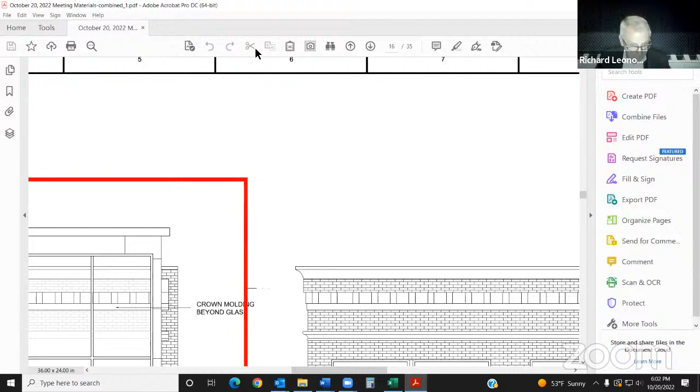Now the big one, I think, is coming. We have two more things. Yes, two more. Next is 519 Linden Street, JBAS, renovations, alterations, and restoration. I have to scroll back up, I'm sorry. Now, this is a major project. Yes, it is.

There we go, all right. Okay, let's go into the pictures there, Brittani. Okay, there's the existing conditions. Correct. And this was what was proposed.

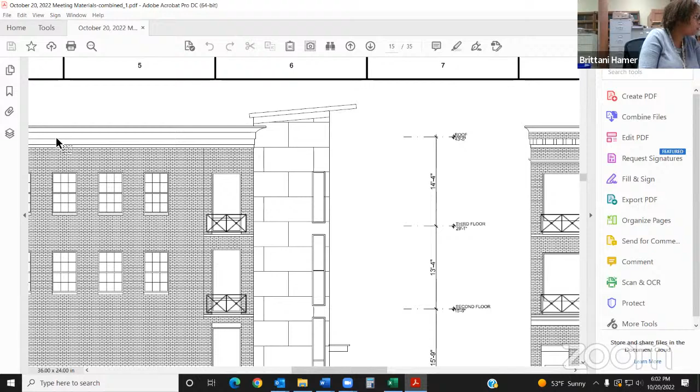Now, if I could zoom out, that'd be great. So if you can roll this around a little bit. So this structure that's going in front, what is in it? That's a stair? Yeah, is that a stair? Kerry, is this your work? Yeah, I didn't submit these to HARB, but yes, this is our work.

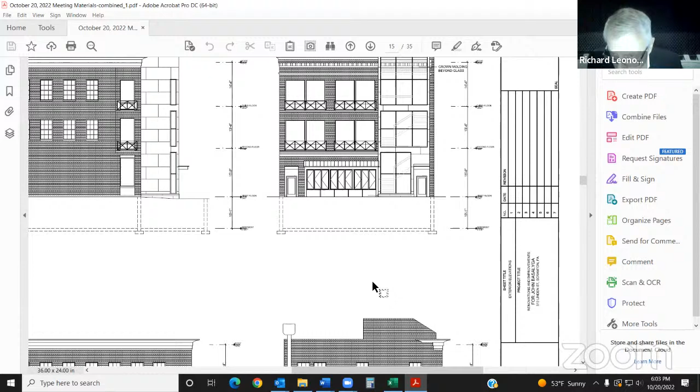Okay, so that is a stair and it is attached to the one side, that's the back. Let me ask about, let's go, the easy parts are the sides. You are cleaning up the sides and both sides will have windows? And it's going to be natural brick or painted brick?

Well, the objective is for natural brick, to clean up the painted brick in the fronts and bring it back to original. We've discovered through some selective demolition that the masonry has no masonry ties and it's zippering, it's delaminating, I'll say, from the wall.

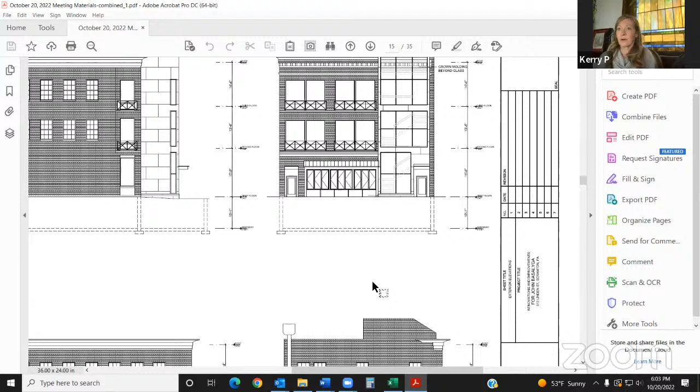So the hope is really to reattach and to maintain a brick look. That'll definitely happen in the front, it'll definitely come around the corner, the historic corner. If you go to the left elevation, you'll see this is over the law offices there. But then we have a problem in that there are no brick ties tying this brick back to the building.

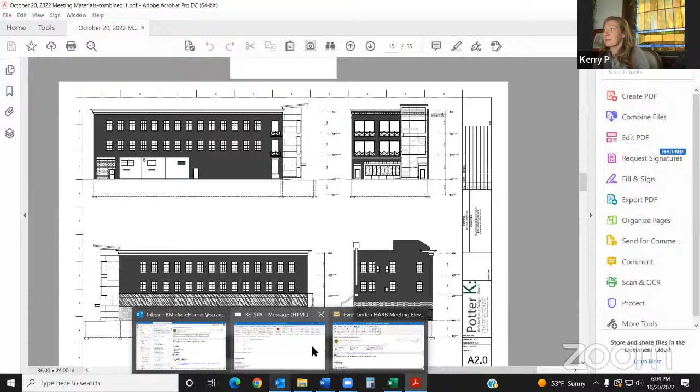So if you go, Brittani, I sent you some rendered elevations. I don't know how difficult— Nope, it's fine, I've got it. I got it just before the meeting, so I'm sorry. No, I'm sorry that they got to you so late. Oh, here we go, yeah, so this should answer a couple of your questions.

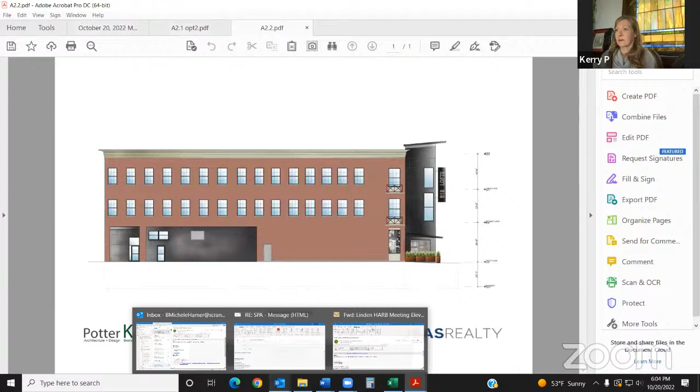This is the design intent, right? Okay, so this is the alleyway, and then this is the party wall that abuts Brickyard next door. Okay, so the windows that we're showing are basically the historic windows.

There's a decorative railing that is on the third floor. It's not present on the second floor right now. I don't have historic photos of this building, so I'm assuming that wrought iron or metal rail is original, and so we were going to duplicate it on the floor below.

Perhaps there's also some talk about having access to a roof deck from those second floor apartments, so maybe doors open out onto a flat roof. What you're seeing on the ground floor, from what I'll call the tower going left, is what will look like a 3-season room, although it's an all-season room with NanaWall, folding glass partitions, opening up onto the street and planters. We wouldn't be building any further out than the existing addition that was added on, God only knows when, that 2-story addition out front.

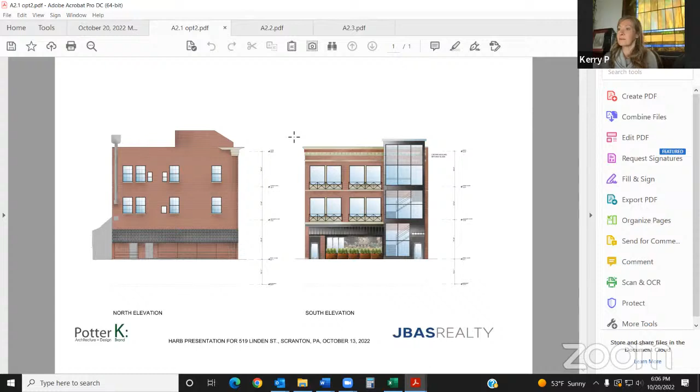We own that far, according to survey. Okay, and then cutting a hole—if you go, Brittani, real quick. Sorry, these weren't PDF'd together, they're all separate files.

This is the existing fenestration. There's an area of stucco that right now we're showing as a zinc metal panel, some kind of metal panel—it looks black. So it's a metal panel covering up a patch job in stucco that exists. Anything that looks like brick in the rendering is what's being shown as brick now, and anything with this metal panel is right now stucco. So this is the existing fenestration pattern.

You go, Brittani, to A2.3, the next page. Thank you. These windows don't quite exist—they may have existed in these locations, but they've all been stuccoed over.

Well, this would be a tremendous improvement. I hate this view of this side of the building that you see from Adams Avenue—it's just a big blank cream colored mess. I hope you can find this, and I hope it's under there. I do too. I really hope you can.

My question for HARB is, the more we demo, if we discover that this masonry just wants to fall off the building, how open are you to entertaining metal panel instead—on the whole thing? I wouldn't say the whole thing, but I don't know.

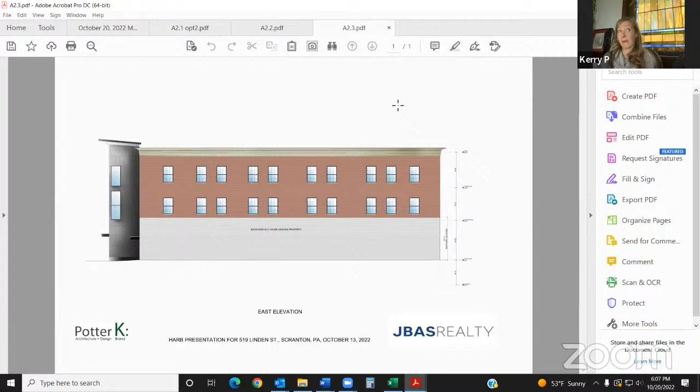First, you mentioned it yourself—I don't know what exists under the stucco. My thought is brick, certainly brick. There are window openings in there; I would think that they're there.

Well, I'm going to ask—is the cornice, you're showing a cornice here, does the cornice exist now or not? If you go to A2.2, Brittani, real fast, sorry. The cornice does exist. The dentil molding only goes as far back as those decorative windows, those atypical windows.

So what is that, like 8 feet, maybe 10 feet? There's dentil molding, and then the cornice runs all the way through to the back alley, which is great. We'd have to go back to photos. Yelena, who works for me, drew all of these up, and she's pretty thoughtful. I can only imagine—although I can also imagine cornice being drawn where there isn't cornice—but she's usually pretty good at going back to photographs, and I rarely doubt her work.

So I'm going to recommend something here, in that you're still in a process of discovery, and perhaps you are being reviewed by the HARB. If you find that some of this is not here, or the money's not here, or the da-da-da is not here, can we make this an ongoing process, where you would come back? If this drastically changes, you would come back and review it with us. John, does that seem fair? I mean, you've paid your dues in a sense, and you are here.

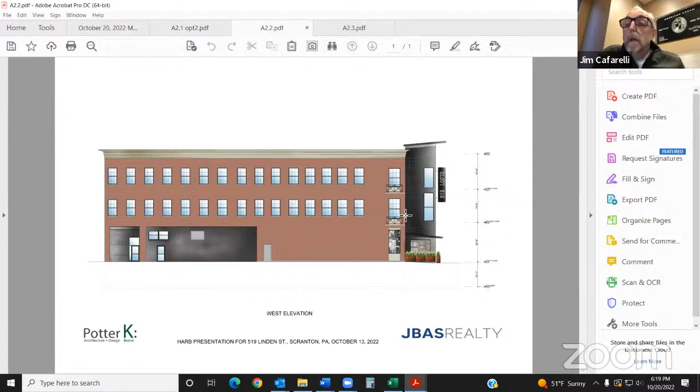So I think the front of the building is not going to change very much. I think the left-hand side of the alleyway is going to be determined shortly.

We really haven't gotten into the stucco over the Irish pub yet, other than the fact that we did see that it has released. The parapet on that side of the building is not in good shape - the capping, the coping, was not installed properly, and there was a lot of exposure to the weather for a long time. So that stucco, when you get up there and look down, there's a 2-inch gap. That's a problem we'll deal with as we stage on that roof and get into it. We're going to have to.

Jim, I think this is enough for a motion. I recommend we accept your process, and thank you for coming. Please come back to us over the next couple of months as you develop this further. I do want to highlight something I hope you keep: I like that the stair tower doesn't go exactly to the corner of the building, so it reads as something applied to a building that didn't originally have this tower. That's a nice architectural detail, and I hope you don't lose it.

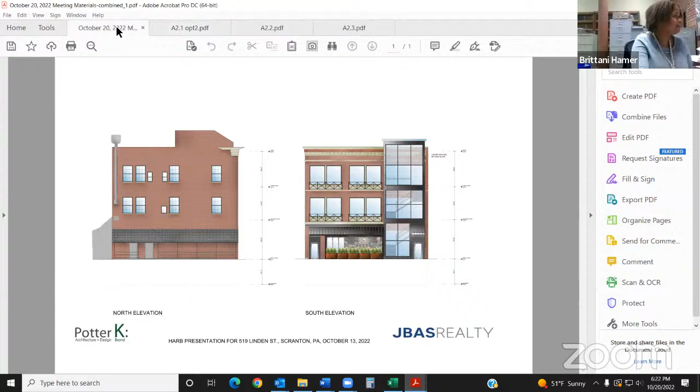Brittani, I think we have one last item. Yes, that's for Mike. It's 223. Michael, your little building is beautiful, what are you doing to it? I didn't even realize that was your building. I used to work next door to you, so when I looked at the pictures I thought, oh snap. All right, let me get started. Hold on, guys.

Typically you'd see the slate or stone sill extend into the brick, but here that joint is just mortar, and it's failed over the years. In any rainstorm, especially more torrential ones, water collects on the sill, finds its way into the mortar joint, gets into the wall cavity, and comes out in weird spots, often through the header of the window below. So I need to repoint the sills regardless, but while I have guys here doing that, I figured I could also have the building cleaned and repoint other areas that need it—primarily the front and along the bottom, where most of the damage and decay has occurred.